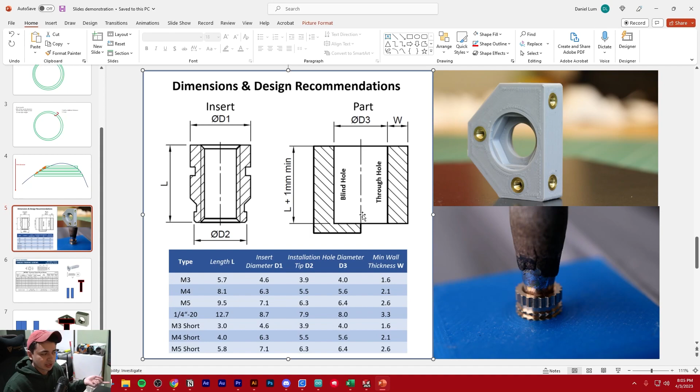So that's option one. If I know I'm gonna reprint something over and over again, I won't use these, because not that they're super expensive, but why waste this when I know I'm gonna be printing out new versions. If I am going to be printing out new versions, I'll use this method, which is thread forming screws. So normally threads on a fastener are cut at an angle such that they just mesh with their corresponding threads. But these are cut at such a wide angle that they create threads as they're forming into the plastic.

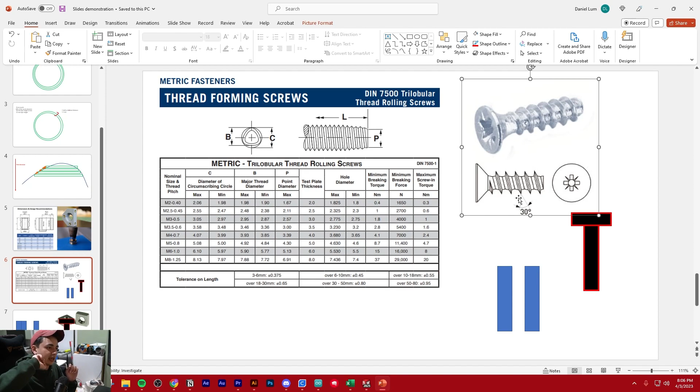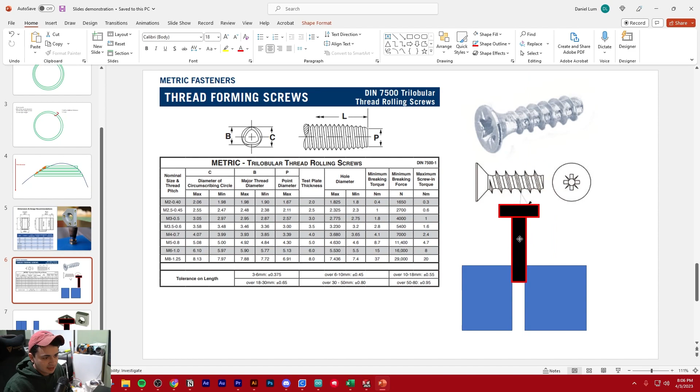So if you imagine that this black and red thing is your fastener, if you just look at it from one plane in a section view, and this is your part, and you have this hole in your part, right? And the fastener is supposed to go through. So if you pretend that this is your thread forming screw, as this comes down, it's going to start biting into the plastic, and it's going to create threads on both sides. So long as you don't over torque the fastener too much, it's going to bite into the plastic and create threads within the plastic that the fastener can mesh with.

And I use these all the time. They're so great. You can get a big pack of them from McMaster, and I'll show you how to do that in a sec.

I have a pack of like 50 of them, and it was a couple dollars, and I use it for all my projects. And I'll show you the McMaster thing in a second.

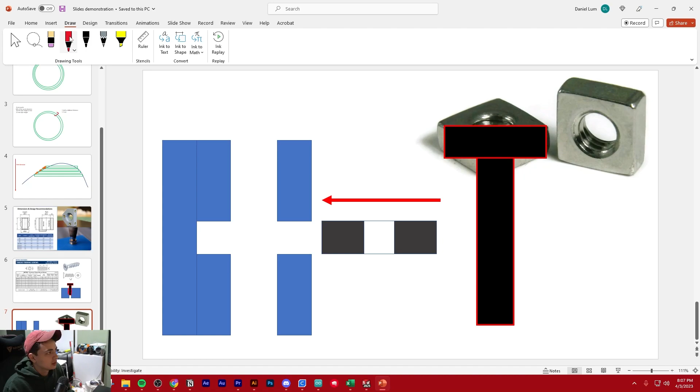But so this is the last thing, and this is called an embedded square nut that I've seen a lot. So a square nut is just a metal nut that is square, and the inside has threads that can thread onto a bolt. So pretend that this is your nut, right?

You design your part so that the square nut can just slide into your part, but the clearance for the hole that the square nut slides into is super tight. So it's gripping onto the square nut, so it can't really go anywhere. So you create a really tight friction fit between the square nut and the plastic, and it just slides in. You might need pliers or maybe a hammer to really get it in there.

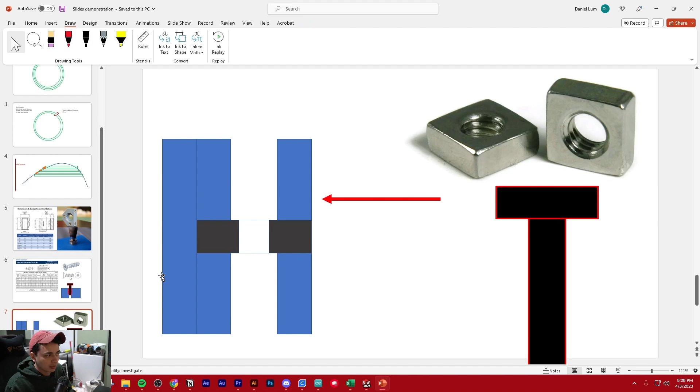And then on the other end, it's supported with another wall of plastic to trap it in. But then you can take your bolts, and now you have threads that engage with your fastener. And it's just another alternative.

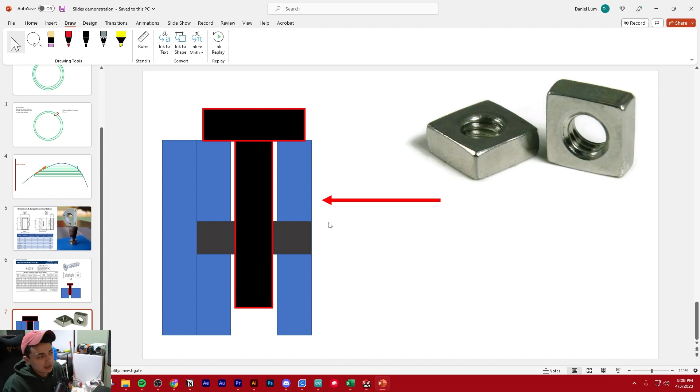But once again, I wouldn't use this method if I know I may have to reprint the part, because you're just wasting hardware. If I know I'm gonna reprint the part and it's not perfect yet, I'll use thread forming screws, because I could still take the thread forming screw out and not use the plastic anymore, but keep my thread forming screw for future prints.

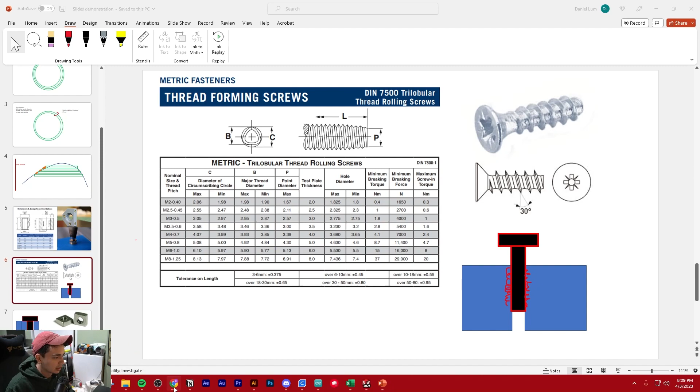So now I'll show you how to do it. McMaster-Carr has a great add-on with SolidWorks. So basically, let's say we needed a thread forming screw, and instead of these plastic fasteners that we're using, I wanted to use metal hardware.

So the way that you get the add-on, I'm just going to Google McMaster SolidWorks add-on, and you click this, you download this. You might have to restart SolidWorks, but if you don't see your add-ins, you go to Tools, then at the bottom, Add-ins, and you just make sure that McMaster-Carr add-in is checked. And then once that's checked, you'll see McMaster-Carr on the right side in your assembly part.

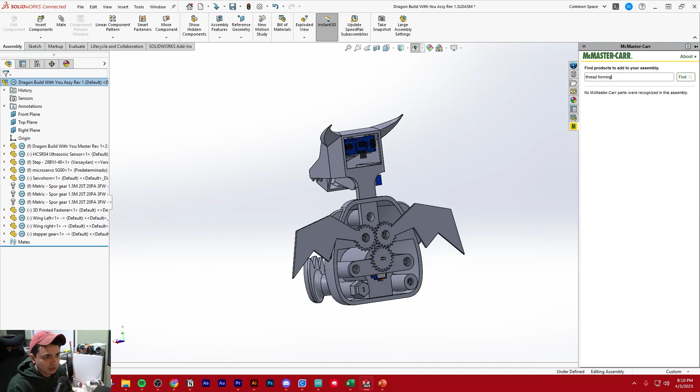And then here's the cool part. I could type in thread forming screw. I use M4 fasteners, so you could type in M4. If you need a specific length, you could filter by that. Let's say we need it to be 20 millimeters in length. And then they give you a bunch of different options, like different heads. Do you want it to be rounded, hex, flat? You could filter by whatever you want.

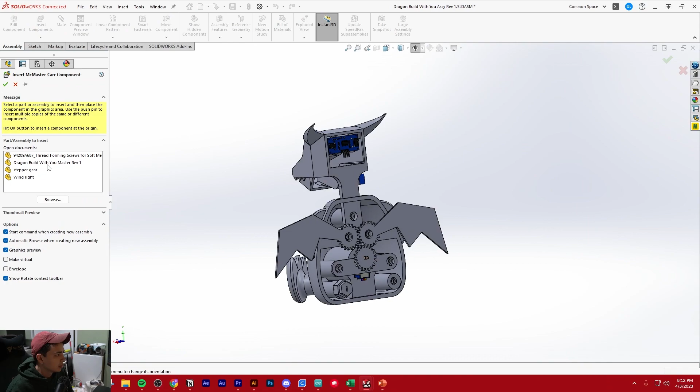And then the really cool part is, let's say you pick out the fastener that you want. If you click the part number, you could do add to assembly, and they have built-in SolidWorks files already for you. So then you just save and insert part. And now you have exactly the part in your SolidWorks assembly.

And then if you wanted to, the add-in will keep a bill of materials for you. And then once you're done with your project and you're ready to order the parts to put your project together, you just preview order and then you purchase it.

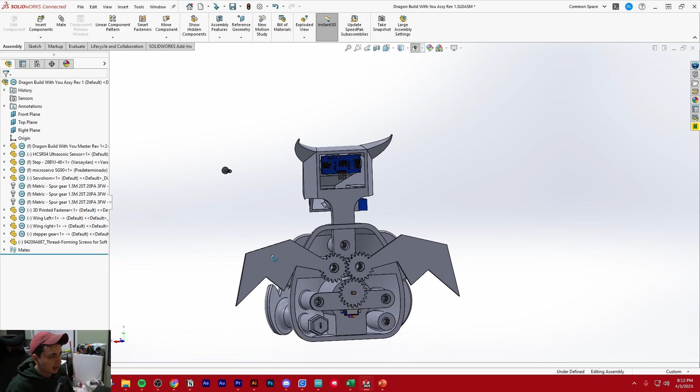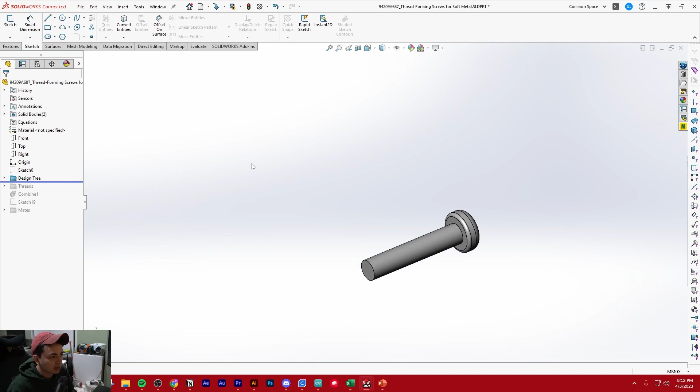Another thing to consider if you're going to do this for your own projects is the threads, because there are so many faces to them, they use up a lot of memory. So if I use fasteners from McMaster-Carr, I'll roll it back and disable or suppress the threads to basically save my computer processing power.

But that's it. Those are the few ways that I'll connect parts together. But that's just a little FYI. We're not going to do that for this project because I'm trying to save you guys some money so you don't have to buy extra hardware. But obviously this is a scenario where

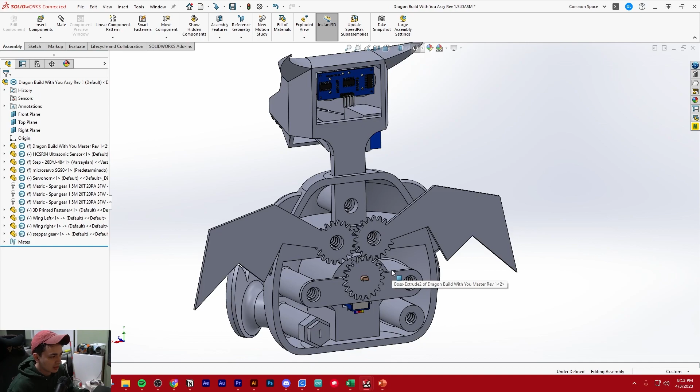plastic hardware isn't needed.